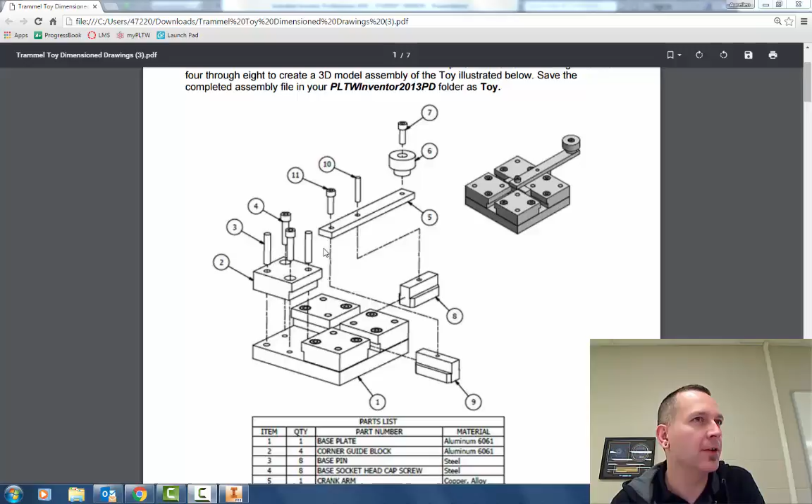So with the assembly completed from last week, our next step is to do the exploded view. And in the directions, there's an example of a way that it can be done, but this is not necessarily the way that it has to be exploded. You may choose to do it a different way. I do like the fact that they've only exploded one of the corner guide blocks and some of the pieces. There'd be a lot of pieces to pull off of this, and it's going to look kind of cluttered. So just doing the one, I think, would be sufficient for what we're doing here.

So to do this in Inventor, I'm going to start a new presentation file. For them, I want to create a view. I'm going to search for my assembled Trammel toy, which we completed last week, and then I'm going to hit OK. So it brings this onto my graphics window display. I'm going to use tweak components then to move the different pieces or to explode this view.

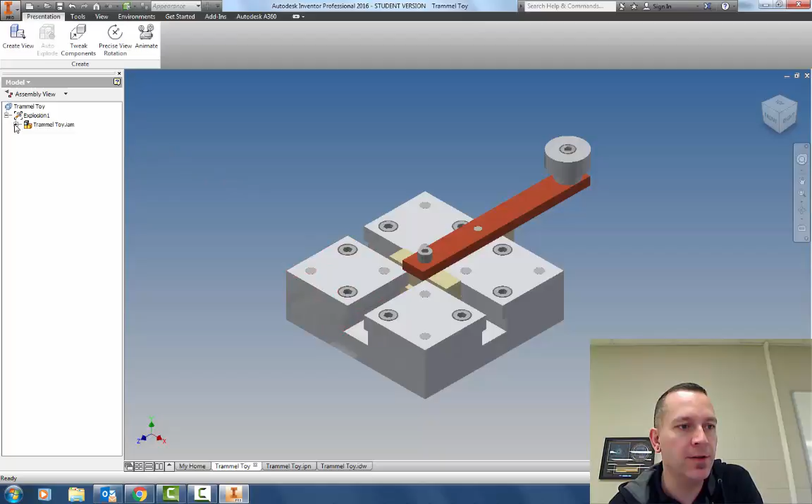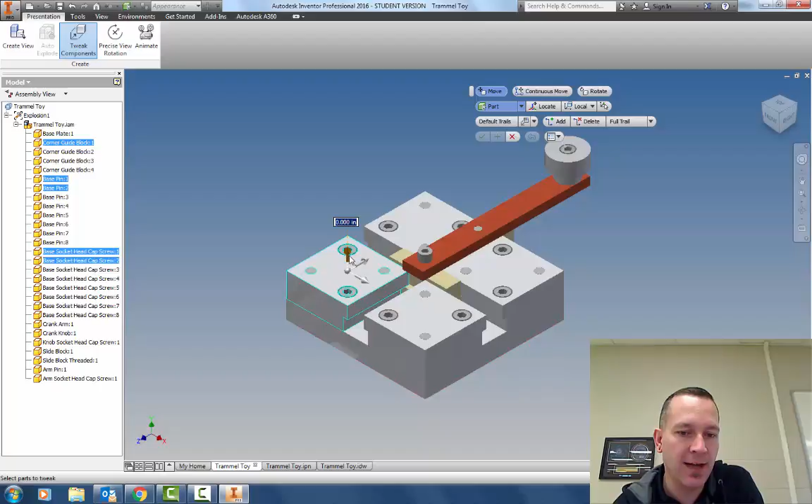When I click on tweak components, the next step is to identify which piece I want to move and then which direction. So in this case, I may move multiple pieces at the same time. So even though I'm selecting the corner guide block, I can also select the other components that I want to move at the same time. It has the right direction, but I can switch directions if I want to. So in this case, I'm going to be moving in this direction, and I can set a distance. So I'm going to try 5. 5 looks good. If I'm happy with that, I hit the check mark.

Next step then would be to move the other 4 pieces that are inside this a little bit farther up. Right, so I do the process again. And if I happen to select something that's round and it's pointing down as far as the direction it's moving in, I would just put a negative number for the distance that I want it to move. Right, so instead of going down, I want it to go up. It's going to be a negative number, let's say negative 2 inches. Okay. They may not be far enough because it's still overlapping the corner guide block. So let me try negative 3.

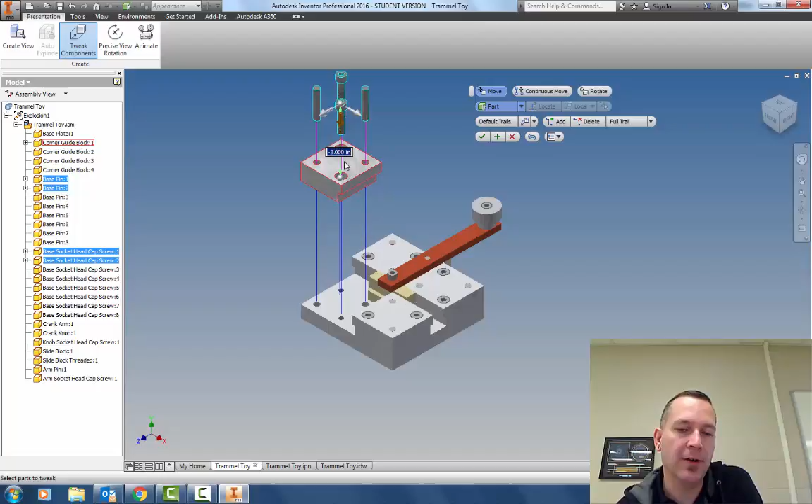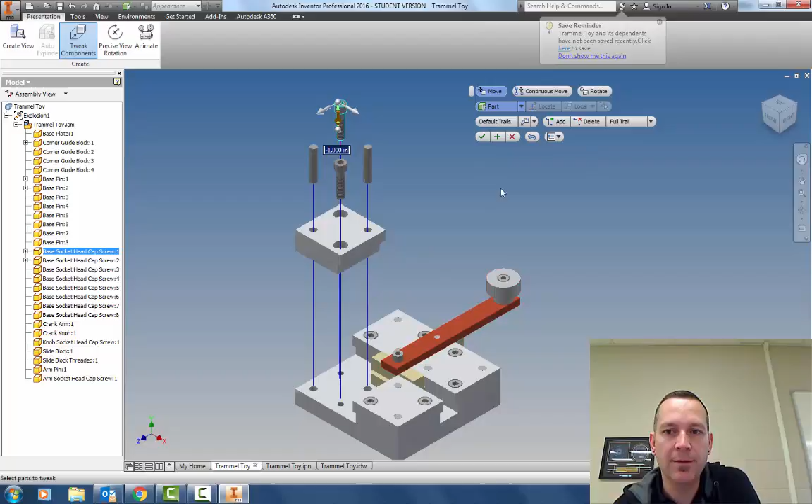Yeah, that's looking better. I may even want to move the other piece in the back a little bit farther up. So I'm going to tweak the component one more time to move this piece in the back. Again, it's going to be a negative number to go up. So let's say negative 1. So it's a little bit farther up. I also want to bring out the 2 slide blocks, the screws, the pins, the knob, and the other parts of this object so that I can see each of these components. And when I do, I'm going to get something that looks like this.

Okay. I used the directions as my template for doing this process, but again, you don't have to do it exactly the same way. Do it like this, you're going to have multiple tweaks. Like this screw was tweaked to move up, to the right, and then up again, so it took multiple steps. It can be done that way, but it doesn't have to be. I do want to be able to see each of the components. Once I finish the exploded view, I want to save that.

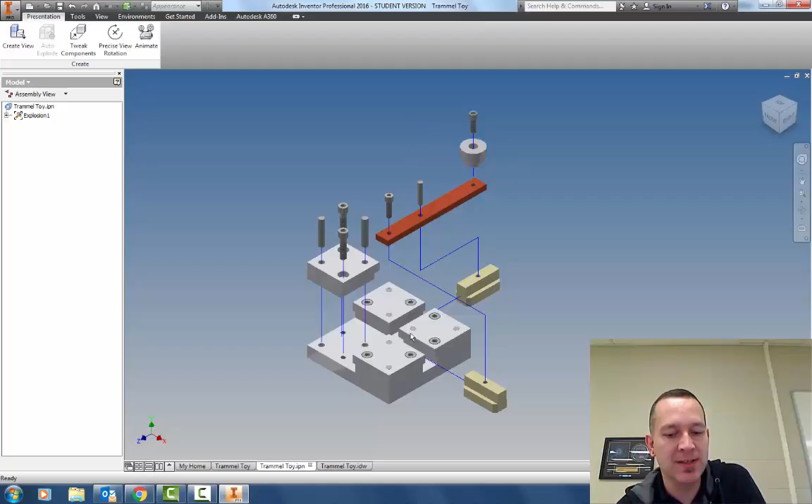I'm going to put together my drawing sheet. So I'll open up my title block. There's only going to be 2 sheets in this title block. The first one is going to have my assembled Trammel toy. I did it at 3/4 scale to get it to fit. I did the top, front, right, and back, bottom, left. So I want to see the 6 views of my assembly.

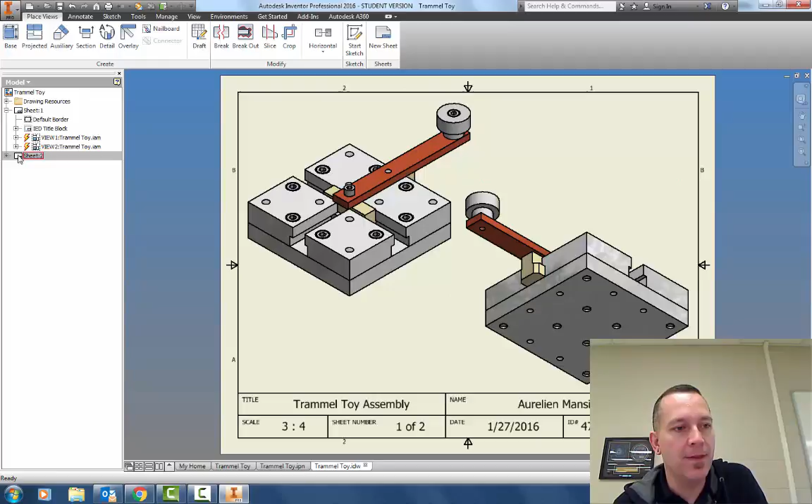And then on the second sheet is going to be my exploded view. So what we just built, I brought that onto the drawing sheet. I added the parts list. On the parts list, I removed the description and added material instead. And then I added the balloons.

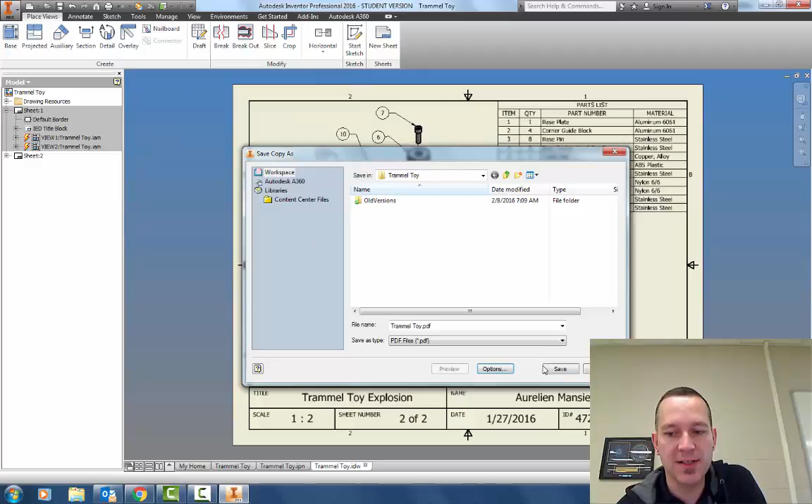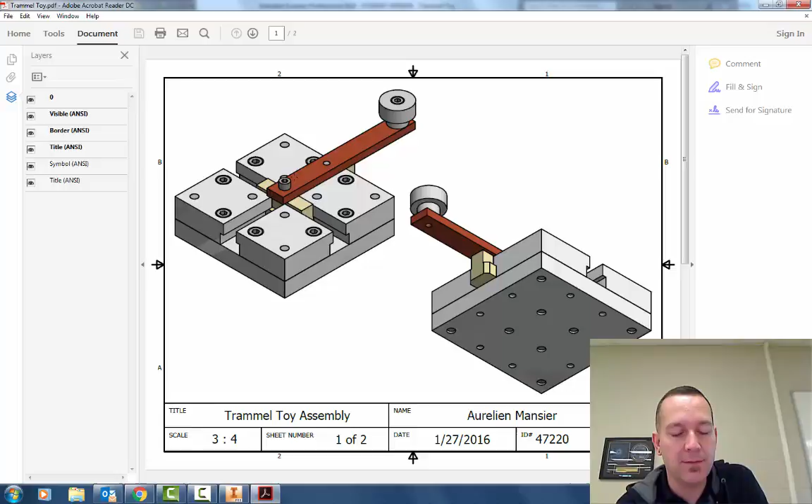When I'm done with this, I want to save this as a PDF: save as, save copy as, change the file extension to PDF. Make sure that you click on the options, and then in the options you include all sheets. That way it's going to make a PDF with those sheets in it, and I'll save that. When you're done, you may want to check that both sheets are there. I'm happy with this, and I'm going to upload this for project 8.18 Trammel toy on the LMS. I'm going to give you between now and Wednesday to get the exploded view and the drawing sheets done and submitted, and then we'll move on to the next activity.